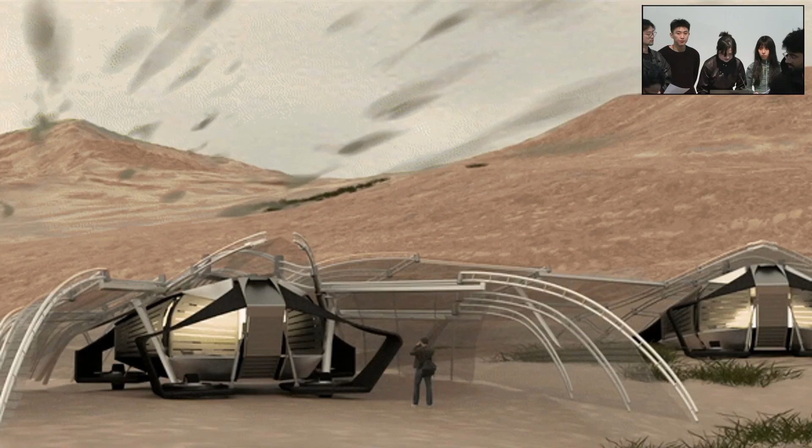With climate change, extreme hot weather influences the ground and environment. Hygro is a proposal for an agricultural response to flash droughts and heat waves. We aim to mitigate the process of aridification by applying the principle of moisture balance. To this end, we designed a dynamic and responsive habitat operated by a community of wilderness rangers living on mobile and transformable units. The units individually and collectively facilitate water harvesting through shading, water condensation, and wind resistance. Water is used to sustain the community and enable soil humidification, alleviating the negative effects of flash droughts, allowing for safer and better management of water and soil towards practices such as regreening and sustainable agriculture.

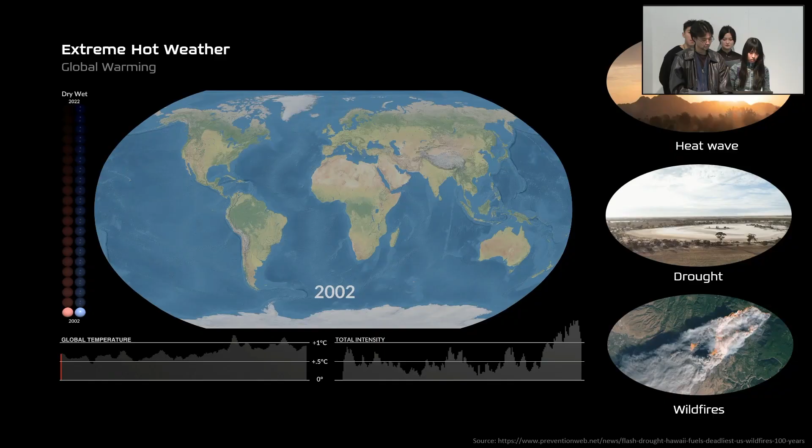Firstly, there is our environmental research part. Our project works for flash droughts that happen in extreme hot weather. With global warming, extreme drying events such as heat waves, droughts, and wildfires are becoming more frequent and normalized.

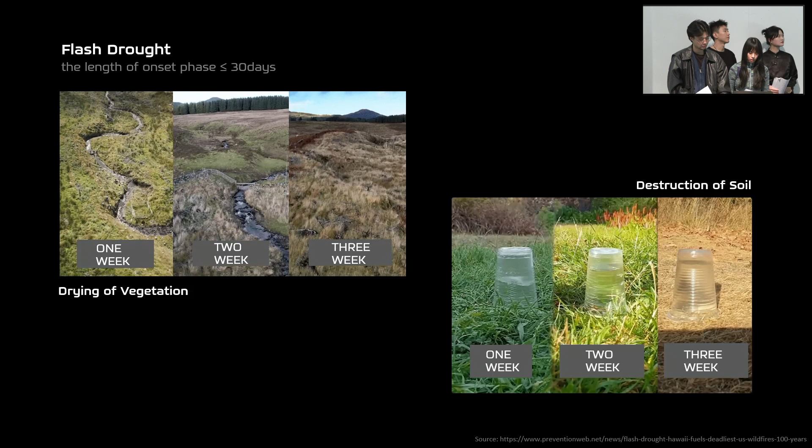From all types of drought, we find flash drought, which rapidly dries out vegetation and prevents the soil from absorbing water properly in only a 3-week onset cycle. The drying out of vegetation provides fuel for wildfires, which spread rapidly once ignited, and the destruction of the soil causes crops to begin to wither, resulting in a decline in crop production and economic losses.

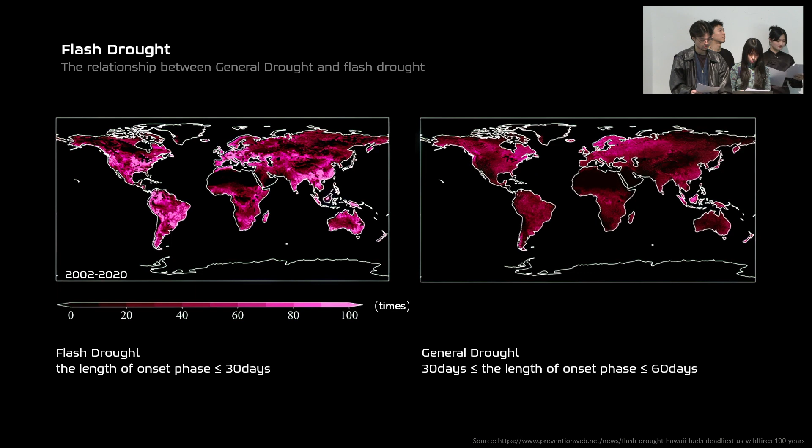By comparing flash droughts with general drought, we find that flash drought happens significantly more often than general drought. This is contrary to our perception of drought as a slow onset process, meaning we need to respond more quickly to flash droughts.

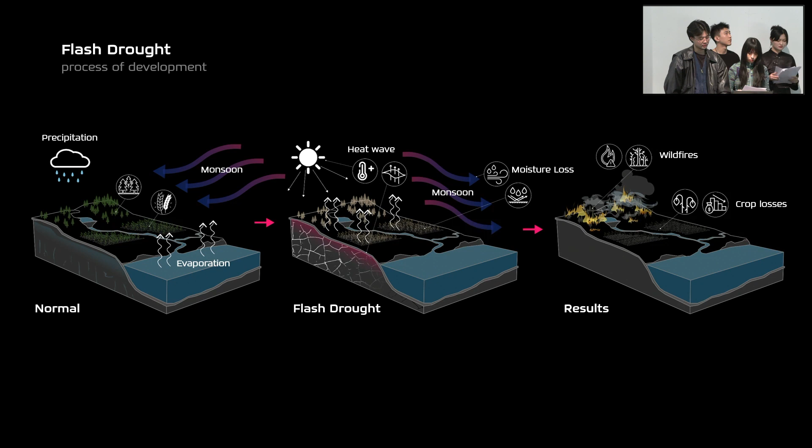We analyze the development of flash drought, which tends to occur in areas where vegetation and crops are able to grow normally under the influence of heat waves and monsoons, where the moisture in the soil evaporates rapidly and is carried away by the wind. This leads to flash drought and results in wildfires and crop losses.

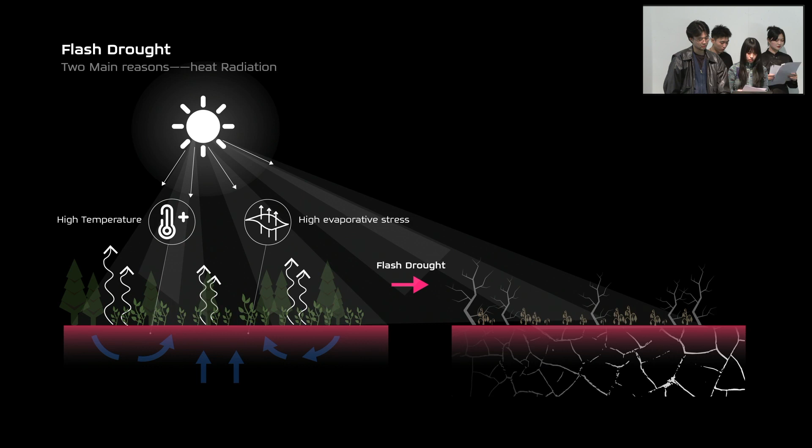Through the process of flash drought, we can say it happens for two main reasons. One is due to heat radiation, which increases the surface temperature and evaporative stress on the soil, leading to a rapid loss of soil moisture. The other main reason is wind: dry wind directly takes away moisture from the soil, drying out the vegetation.

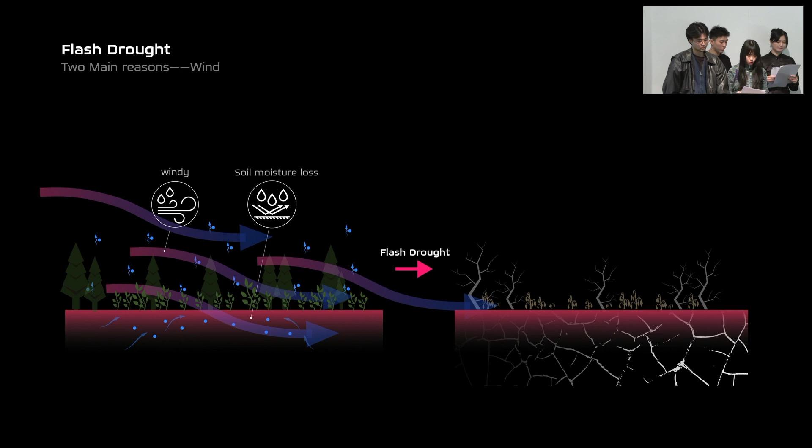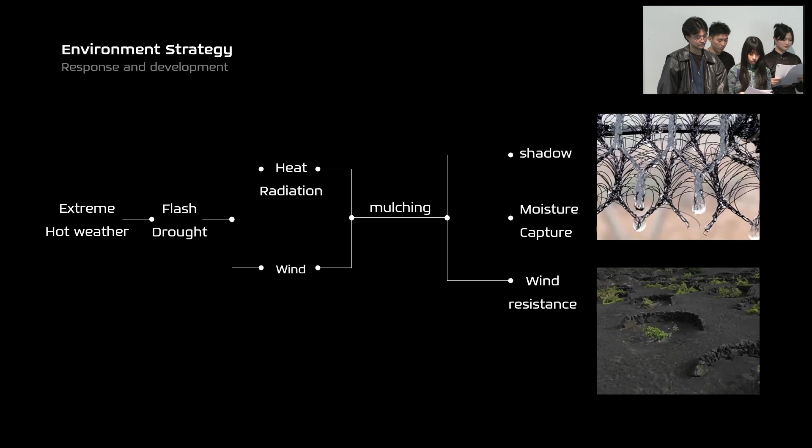In response to the causes of flash drought, we reference mulching. Mulching provides shade for the vegetation and reduces evaporation of soil moisture, as well as resisting wind from carrying it away. So we use mulching as an overall strategy for responding to the environment, and continue to explore how to provide shadow, capture moisture, and resist wind.

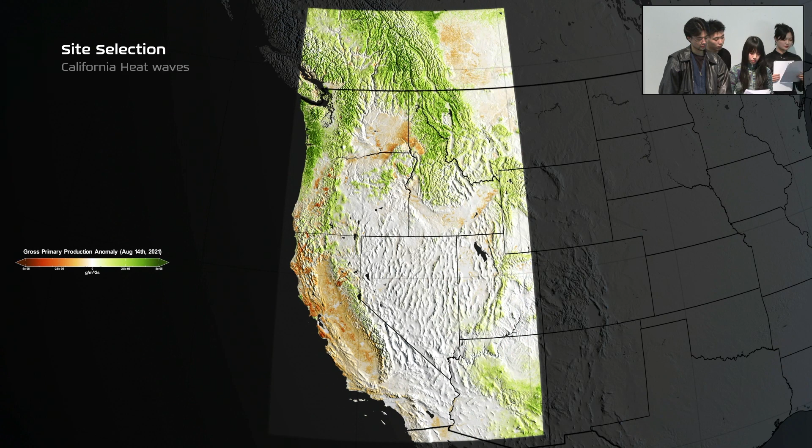So we further analyzed California, where the land is under extreme evaporative pressure due to heat waves. Vegetation has become extremely dry and the productivity of the land is declining. In addition, California is prone to monsoon winds.

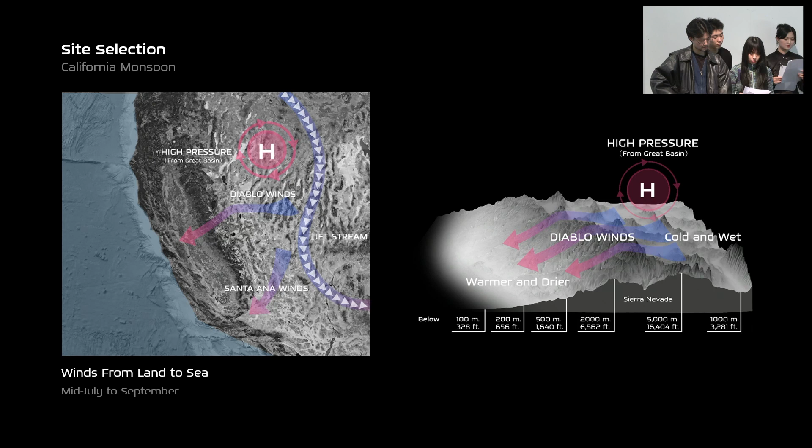These winds start in the Great Basin and blow towards the ocean. In the process, the winds are compressed and become warmer and drier, thus affecting the vegetation on the surface. So we analyze two important indicators for California: heat radiation and wind velocity.

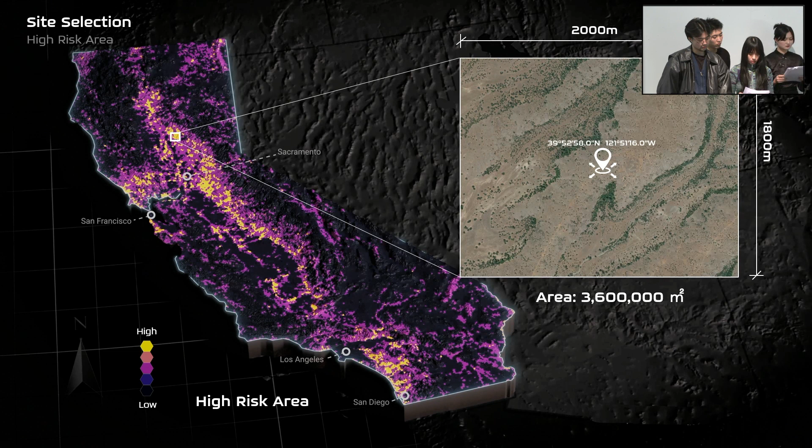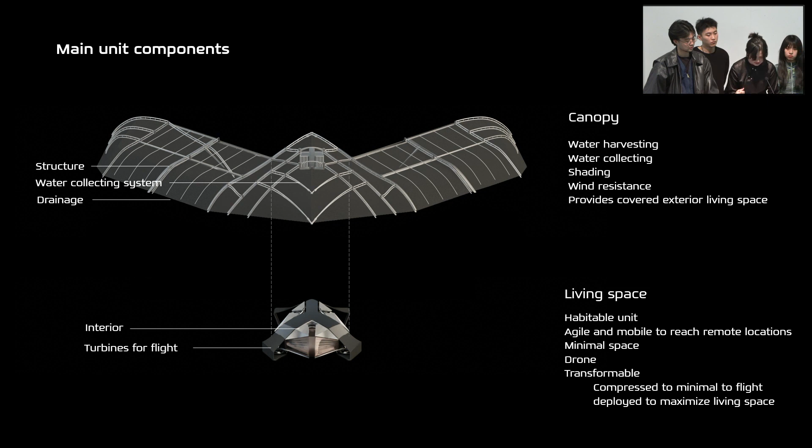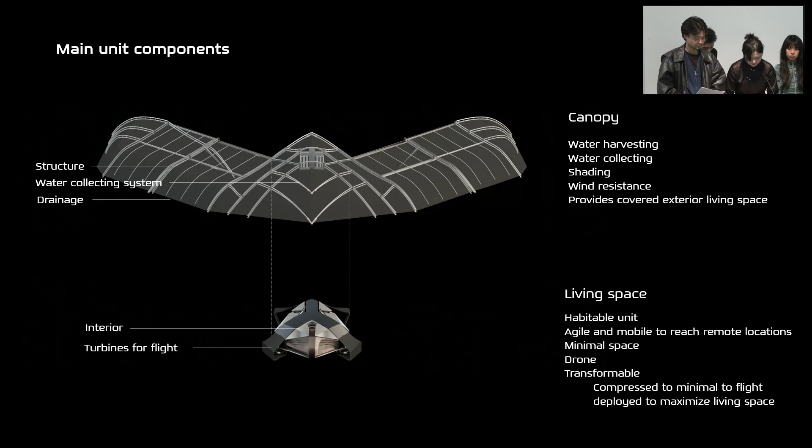Our units have two main components: canopy and living space. The canopy does most of the response to the environment, like water harvesting and collecting, shading and wind resistance, and provides a covered exterior living space. The living space part is a habitable unit, agile and mobile to reach remote locations.

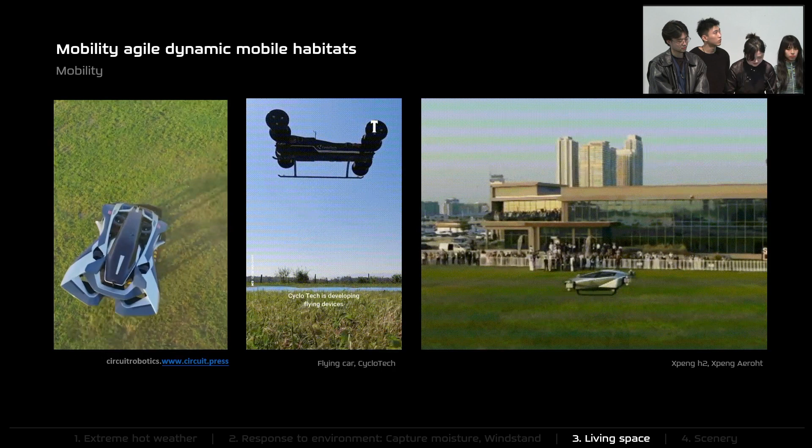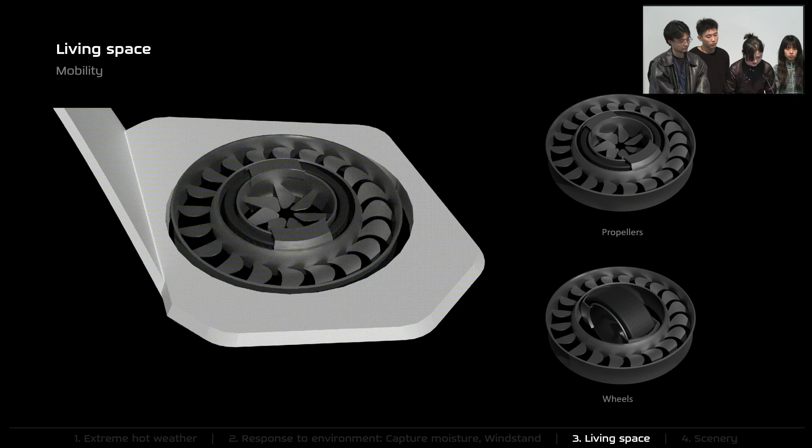There are many complex terrains within the site, such as mountains, plains, basins, etc. These complex terrains require the unit to have the ability to fly in order to reach different destinations. We wanted it to move slowly so it can cover more area, and also to move to another destination very fast. So we use propellers and wheels to satisfy the requirement of moving on ground and flying.

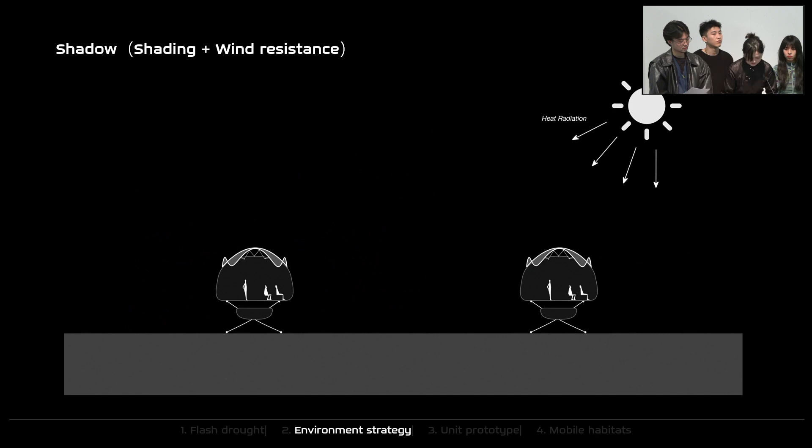With the principle of mulching, it's important to capture moisture. First, we need to respond to external sunlight and temperature. Because of solar radiation, the surface temperature rises, which increases the evaporation of soil water. So we want to create enough shadow with a deformed roof to decrease the ground temperature and reduce evaporation.

Second, the deformed structure should also act as a water harvester to resist evaporating water from going into the higher atmosphere. The evaporated water can be captured by the netting structure.

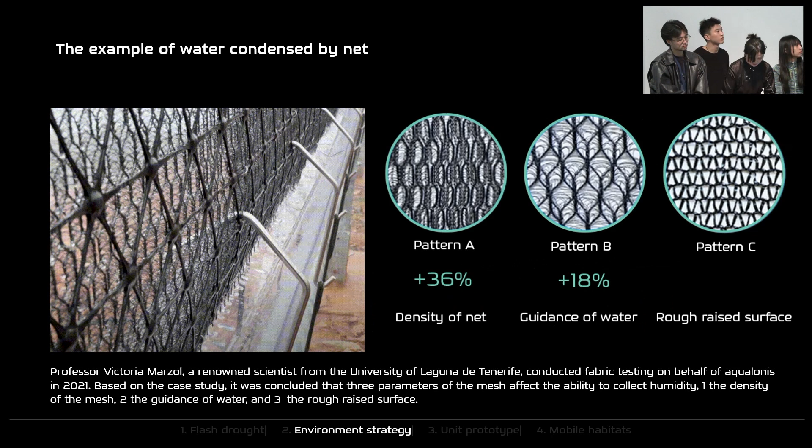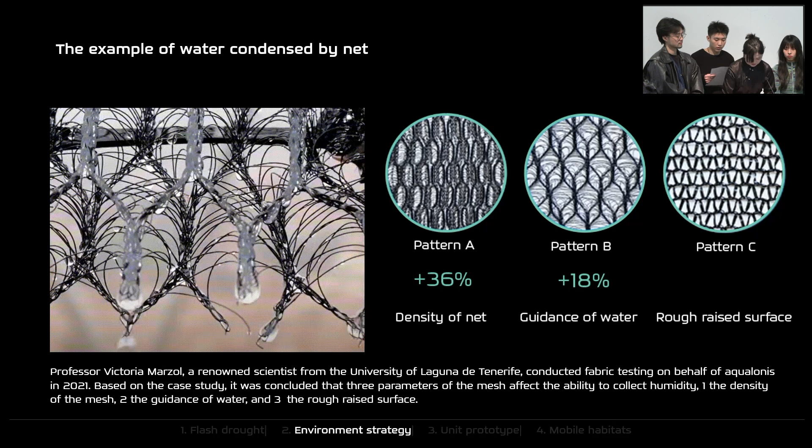From the reference, the factors affecting condensation are the density of the net, the way water is directed, and the tips of contact with water. The effect of pattern on water condensation shows that three different patterns: the more compact the net, the more water it can condense.

We also got the idea from natural creatures like lizards. Lizards have structures of varying densities and tiny grooves and spike-like structures on the surface of their skin.

We found that the more compact the pattern, the more organized the water flow and the less it drops. In the last pattern, we changed the shape of the net and figured out that shape is also a parameter.

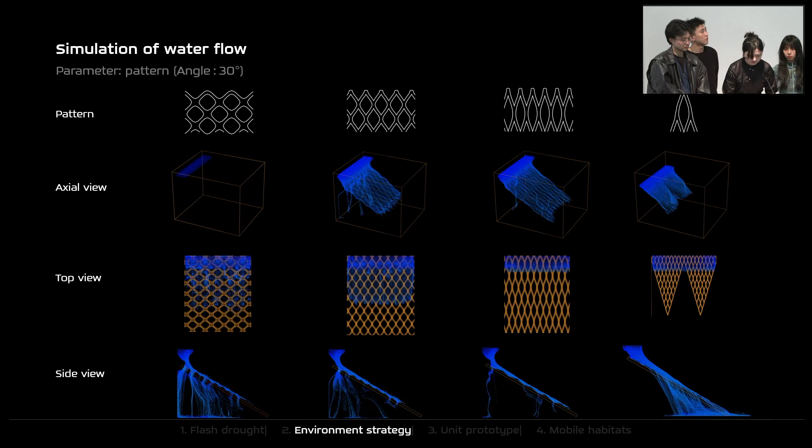to organize water flow. At a 30 degree decline, we controlled a certain angle. We found that water drops fastest in pattern 4, where it's not organized, and slowest in pattern 1.

After that, different shapes of water droplets were calculated, and finally the relationship between the droplets and the tilt angle was derived: the larger the tilt angle, the smaller the droplet size.

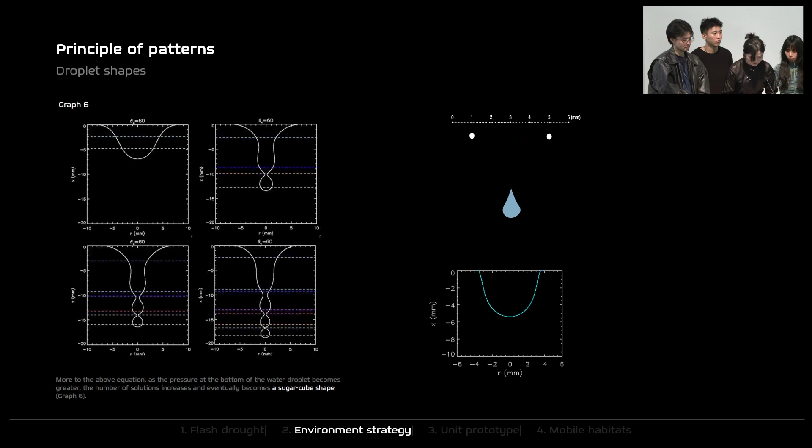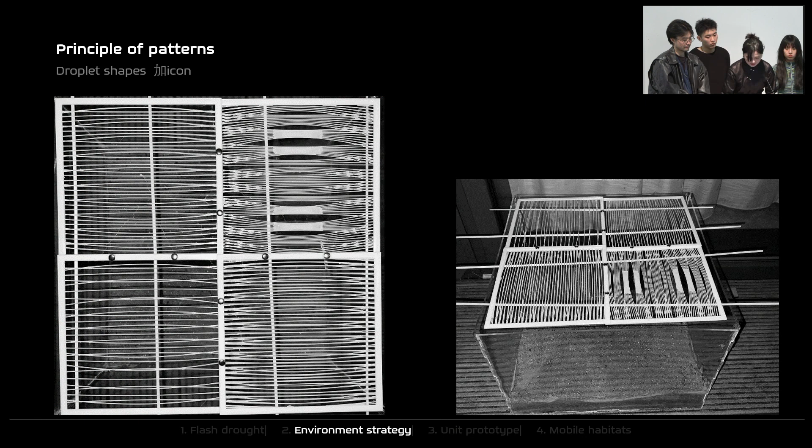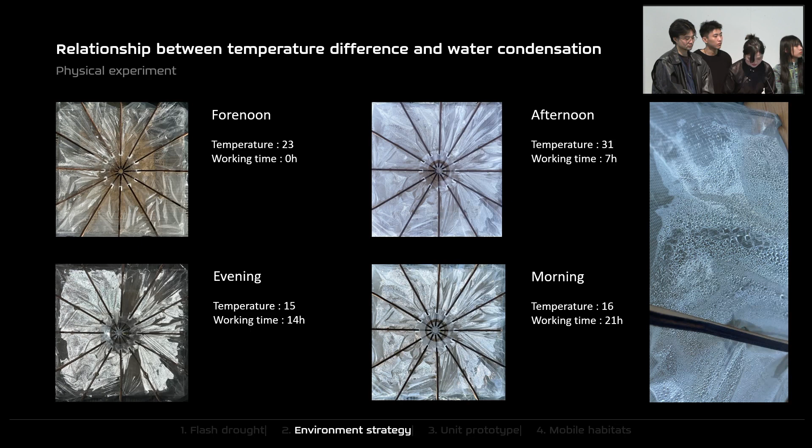Vapors condensed have different performance at different times of the day. To simulate the change of water evaporation, we added a quantity of sand and water in the glassware. It shows that the highest efficiency of water condensation happens in the morning, the period of greatest temperature variation.

We tested the nets with different parameters like density and pattern, and found that a 3.5 millimeter grid can condense the most water.

Different shapes of bumps show that cylinder bumps and cone bumps can attract more vapor. The water flow needs to be organized, and we tried straight and declined patterns; inclined patterns have better performance than the straight one.

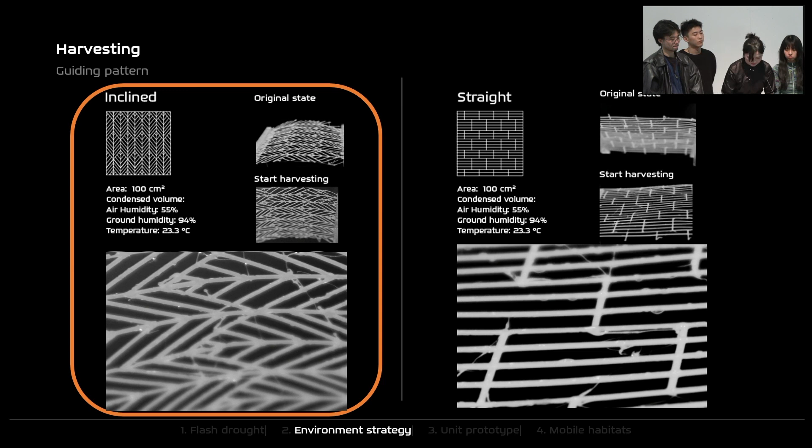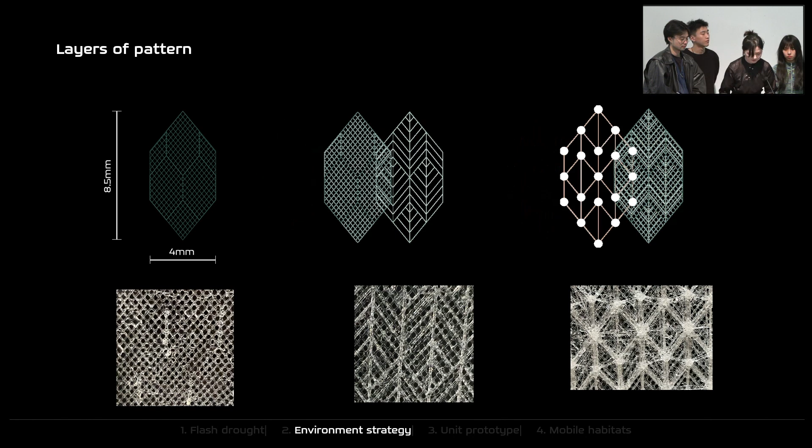With all the results, we tested them in a natural environment with specific air humidity and soil humidity, then tried to connect each layer together. We superposed the layers and added structures, shown at the bottom.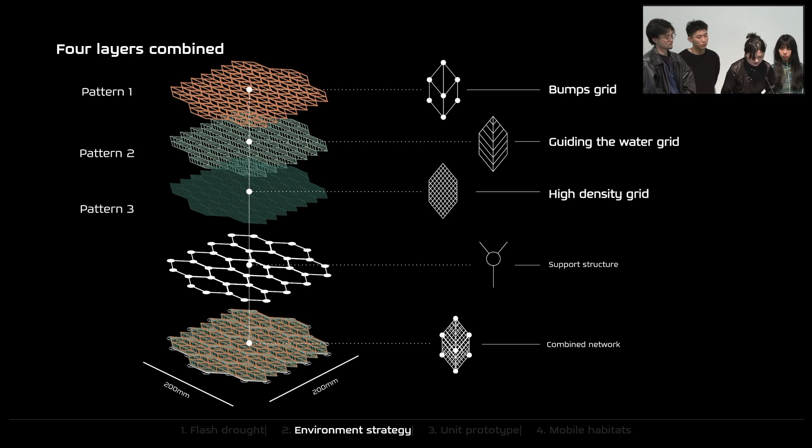The first layer adds a wider soft skeleton and toughness bumps. The second layer has wing-like shaped branches that direct water flow. The third layer increases the density of the grid and its contact area with air. Finally, the bottom layer is the supporting skeleton.

The combined net has better water retention capacity because of its relatively three-dimensional structure, where water droplets can stay inside the net.

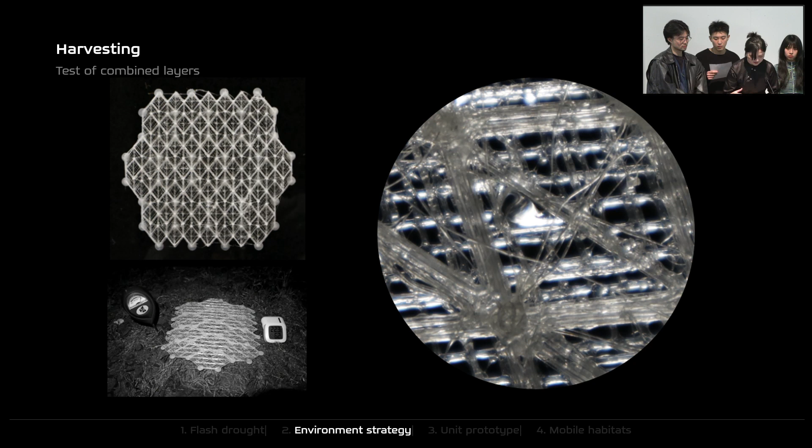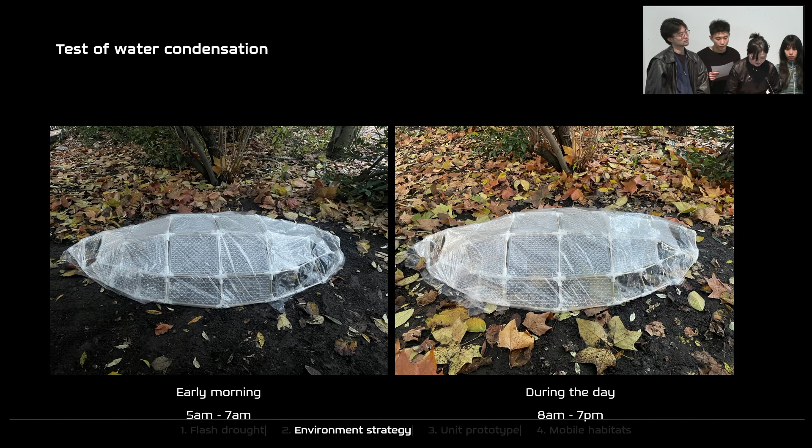To test the quantity of water the net can collect, we put the model out at different times of day, in the early morning and during the daytime. During the day, there's not much water condensed on the net, but in the morning, some water condensed in the net structure, shown by the red circle marking the droplet.

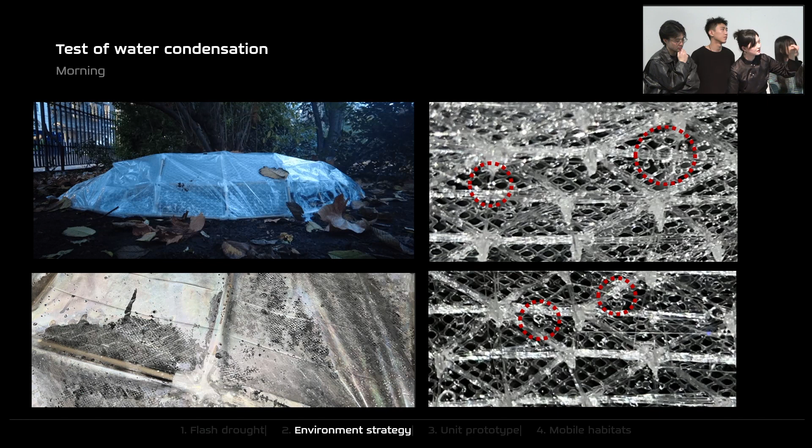To weigh the net and structure together, we get a quantity of water. The water harvesting structure is sloped at the edges to allow condensed water on the surface to flow into drainage for human use. The first diagram is very vertical to the rooftop, meaning it can't flow much water to drainage, while the second one has a specific angle.

When the angle is very big, the water will drop back to the ground and can't flow to drainage.

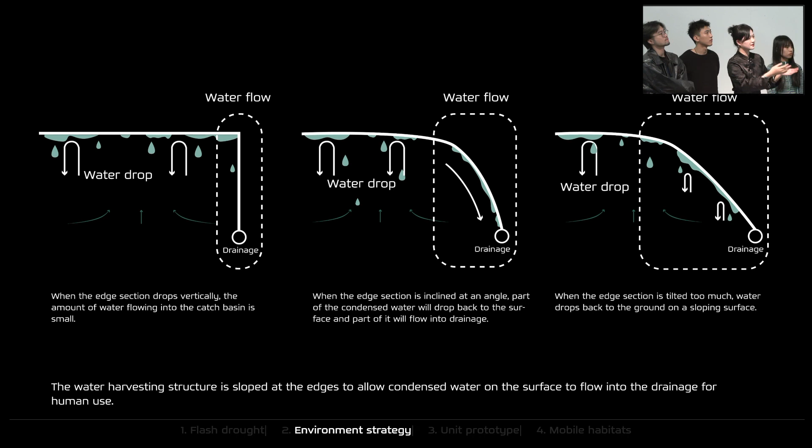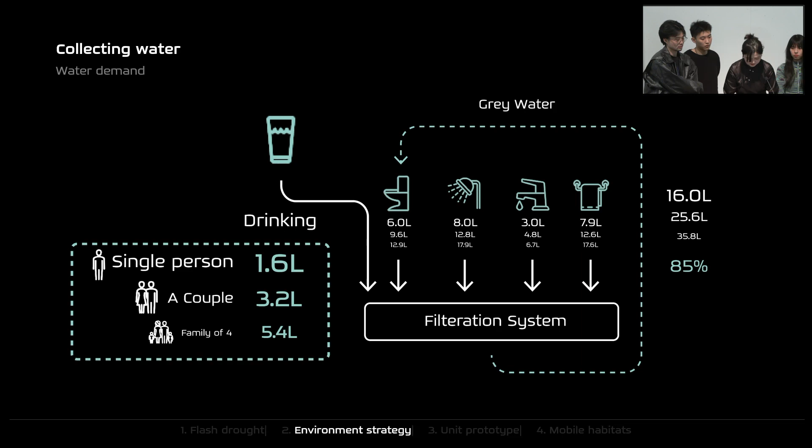By researching the demand for water use, we use recycled water to support household and bathroom needs, while drinking water needs to be collected from the environment.

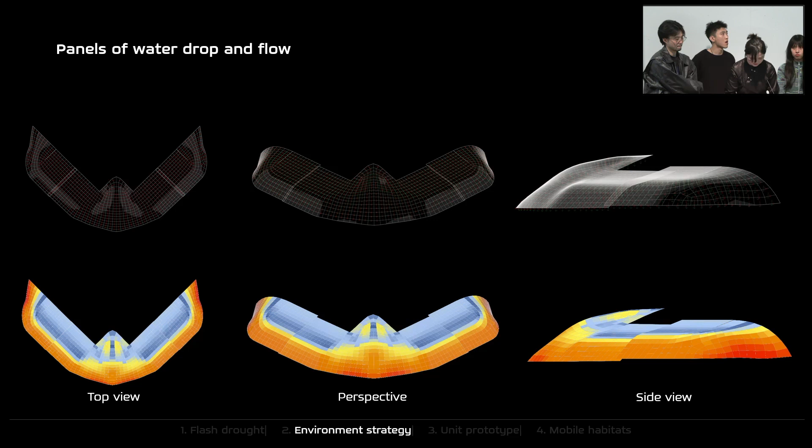To test the angle of each panel tilted, it leads to the percentage of water drop and flow. Based on the quantity of water needed to support human use, it leads to the size of the harvesting canopy.

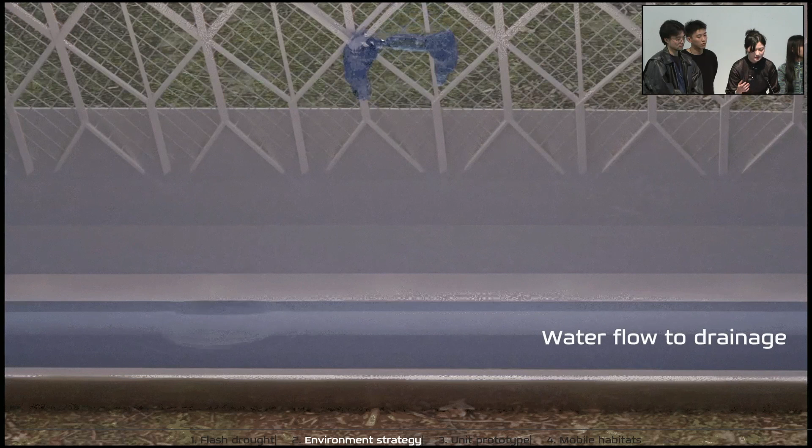Here's the animation of how the condensed rooftop canopy collects water and makes it flow to the drainage for human use. We use a net with declined tilts to make the water flow into drainage.

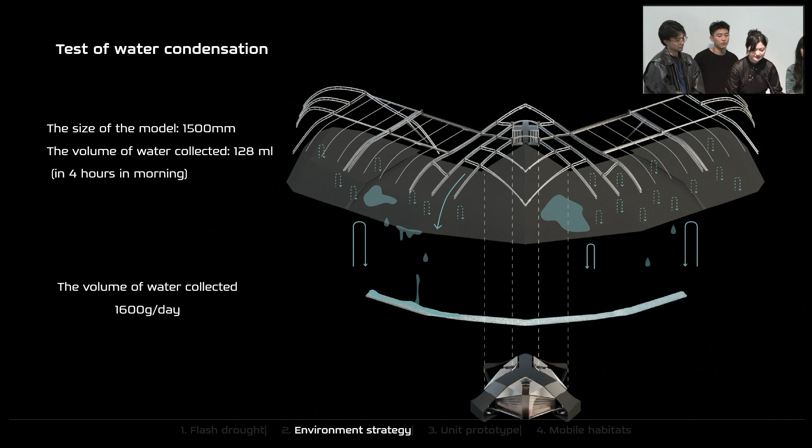And here's the quantity we calculated. We found that we used a model of 1.5 meters and modified it to calculate that it satisfies the human use of water.

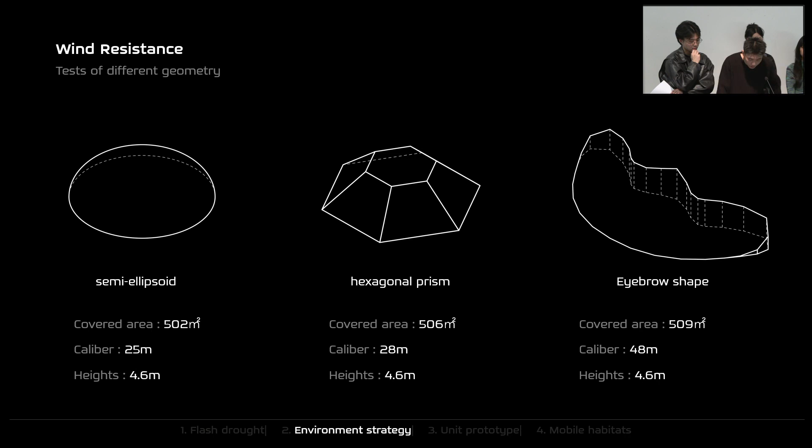So we compared the eyebrow shape to a different base shape for testing, keeping the same covered area. Then we ran the simulation to evaluate the performance of wind resistance. The eyebrow shape is the optimized shape.

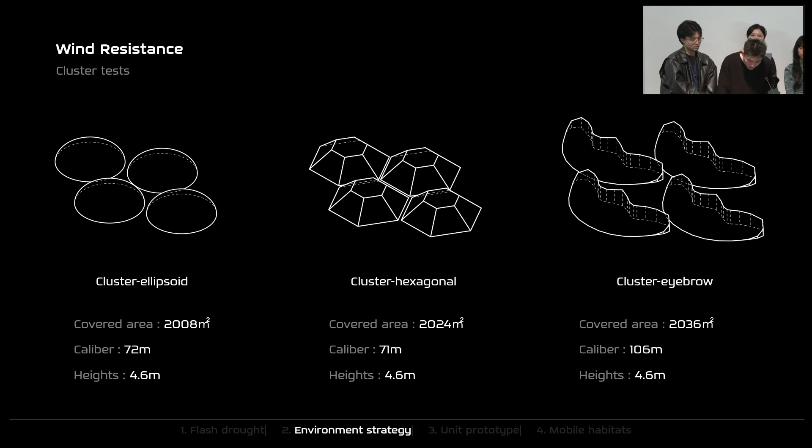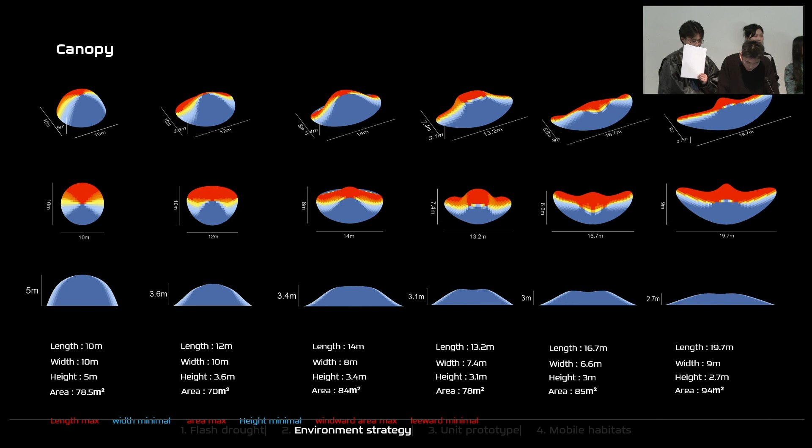We also compared clusters of different shapes. The eyebrow cluster is also the best. So we tested the relationship between the windward area and the wind resistance factor and came up with an optimized result. Those are the digital visions of how that can work.

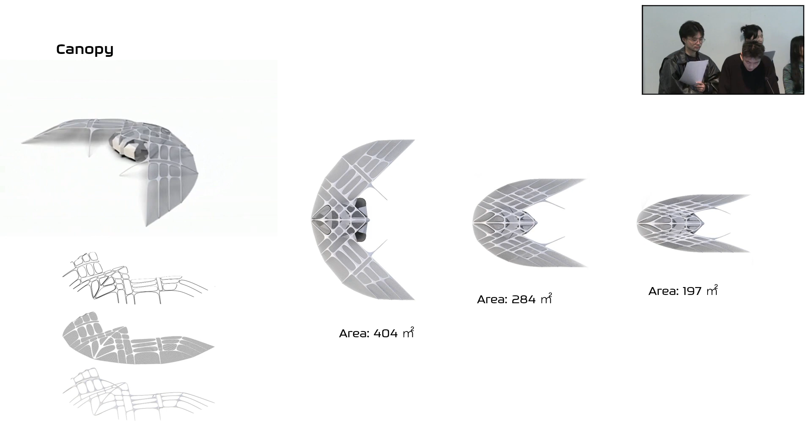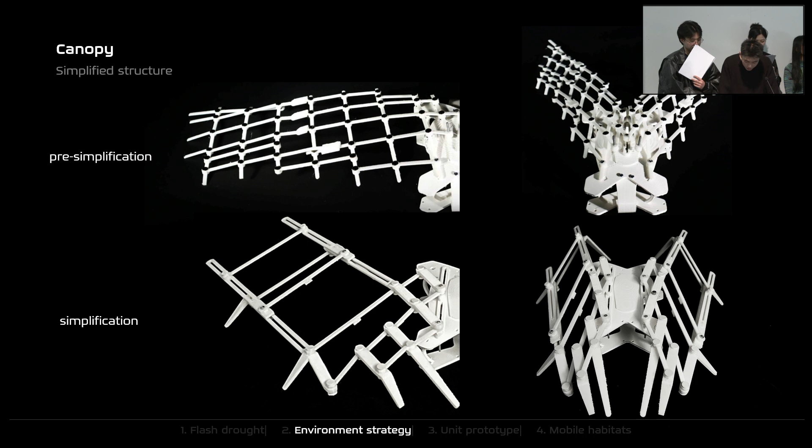Based on the simulation result, we corrected the first vision of the canopy structure, but it had too many joints and wasn't lightweight enough. So we made it simpler, reducing some rods to minimize the structure.

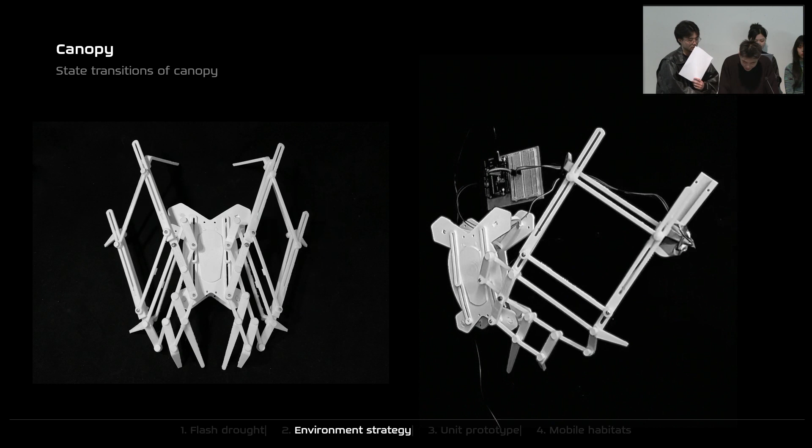I made the double deformation to enlarge the form variable by twisting and sliding. You can see the video—it's all on the Arduino.

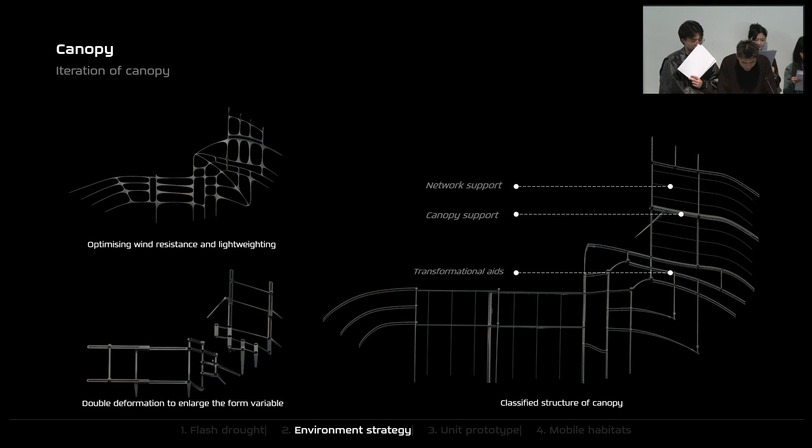Those are the iterations of the canopy: first for optimizing wind resistance and light weighting, and second for enlarging the form variable. We classified the structure of the canopy—some rods for network support can be very lightweight, while for the full structure it would be stronger. Those are the different ways of transformation of the canopy.

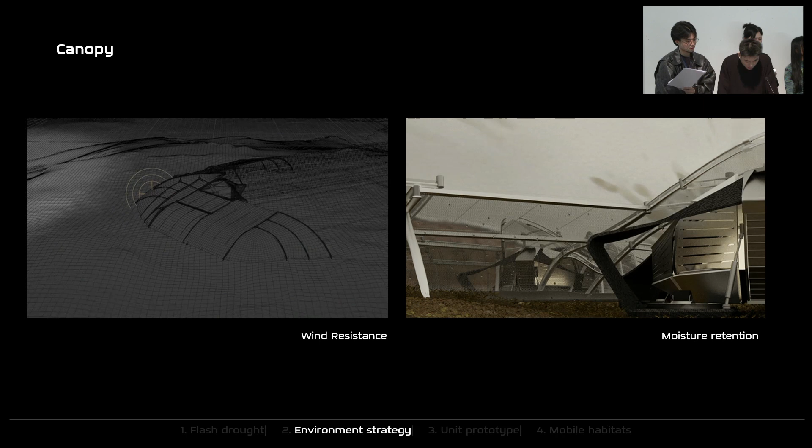In order to better adapt to the deformation of the structure, we tested different ways to select harvesting sites. This is the physics model for the harvester. When wind comes, the air behind the canopy gets less wind, which protects it from flash drought.

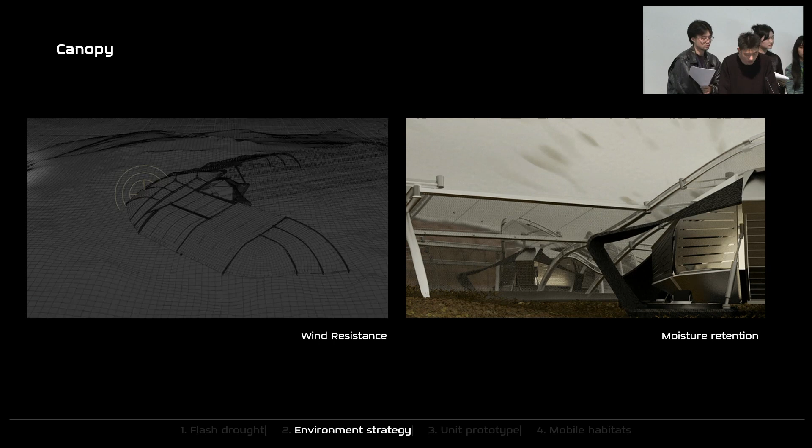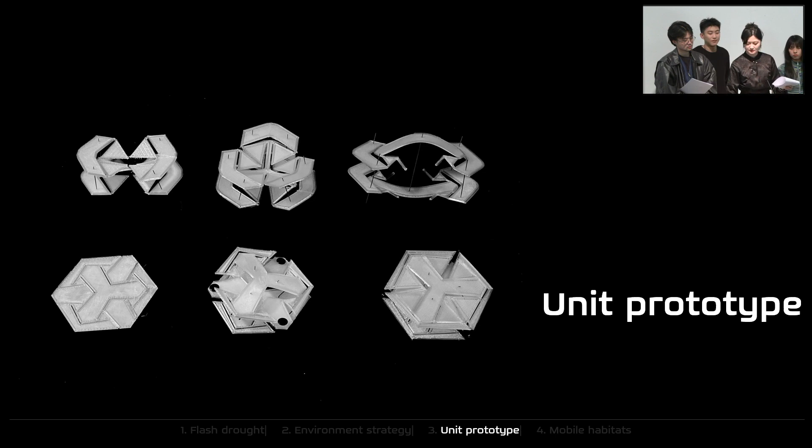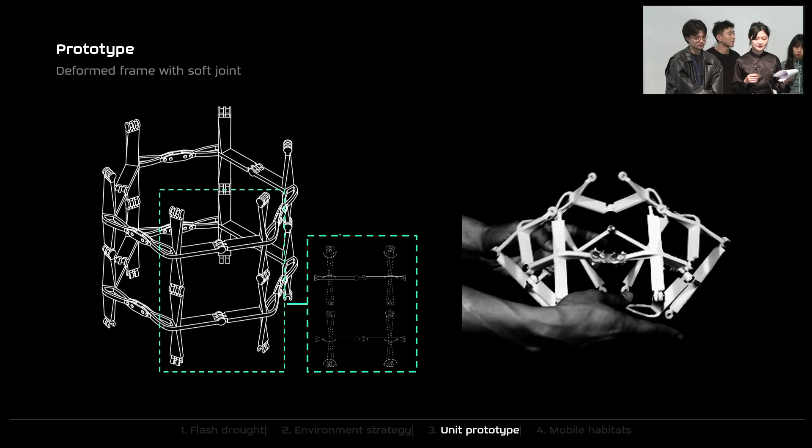To explore the possibilities of spatial contraction and expansion, we tried a series of prototype attempts. The deformed frame was the first one we studied to discover the possibilities of spatial extension and deformation interlocking. Here is our first attempt at enclosing the volume, which can contract inwards and expand outwards.

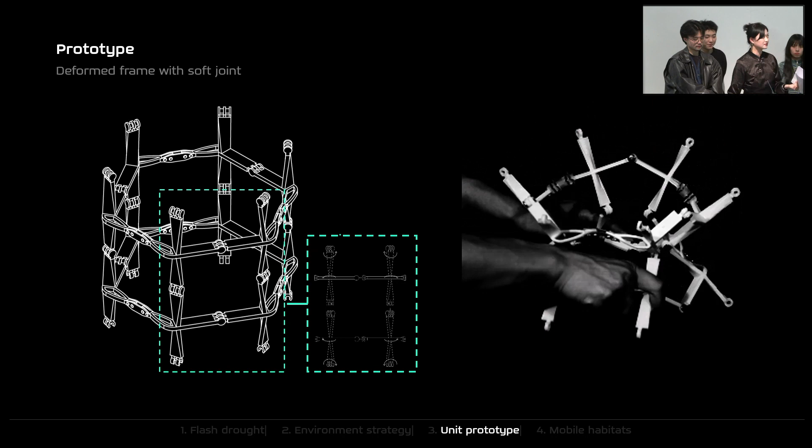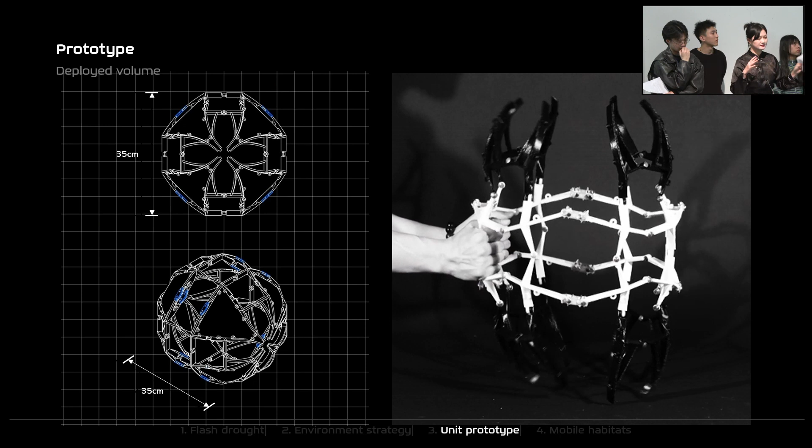We also tested soft linkage and used the deformed frame to connect them. We found that the deformed frame has good linkage performance, meaning it can move together with all the joints. Here is the deployed volume model that can transform well.

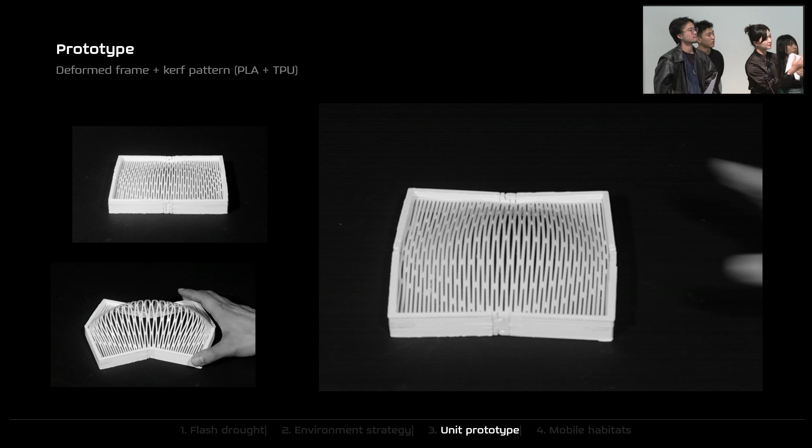We added more folded times to the deformed frame, and we added a kerf pattern together with the deformed frame to make it like bumps to expand the space. To make a double layer, it can act like that.

Next is about the prototype of living space. The demands of living space are that it can be flexible for moving and expanded to provide a more comfortable living space. So we started by studying the bistable structure, and we found that all the transformations are driven by the triangle drivers.

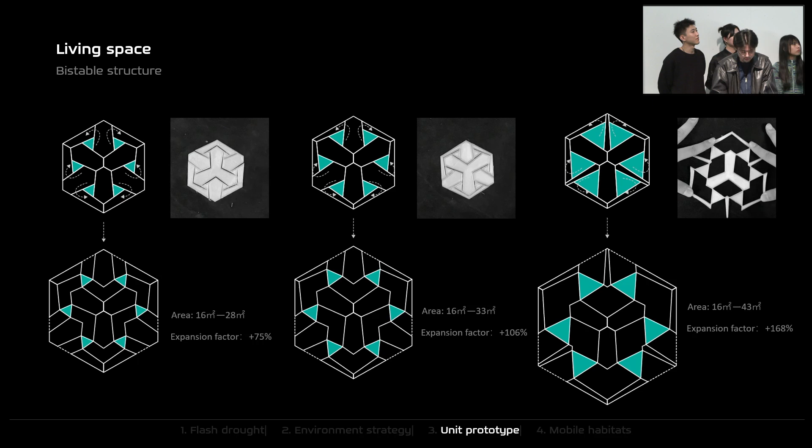The good point is that it can be expanded by itself. Also, if we want the expansion factor increased to the next level, we can make the triangle drivers rotate themselves, and it can expand into more than twice its original size.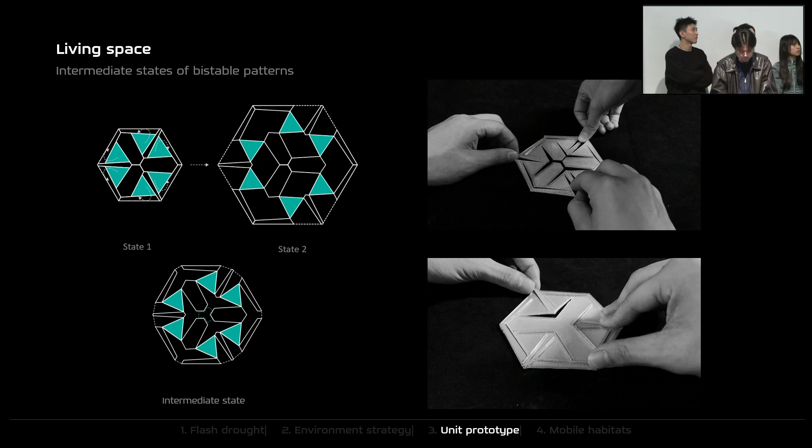As we continued to look at the bistable pattern, we found that if we connect the gap, it will expand in the vertical direction. So by this, we tried to combine the double layer structure, and the pattern itself can be transformed from the panel to volume.

So we made the driver for the dynamics of the transformation. It can work like the video.

We tried to structure it with rigid geometry to envelop the space. It was not only expanded in volume, but at the same time the single layer space was turned into double layers. But we still wanted it to expand from volume to volume, so we tried some types of different layers of the bistable structure.

After we structured the soft one, we found it was very hard to control the angle of rotation, and the deformation is hard to drive, which makes driving the deformation difficult.

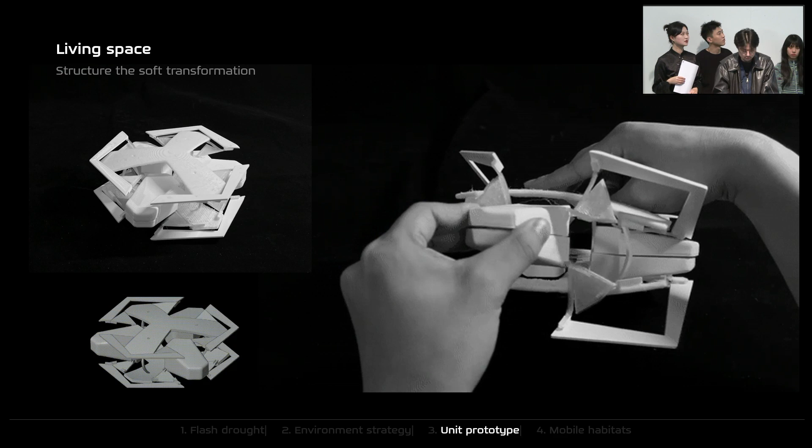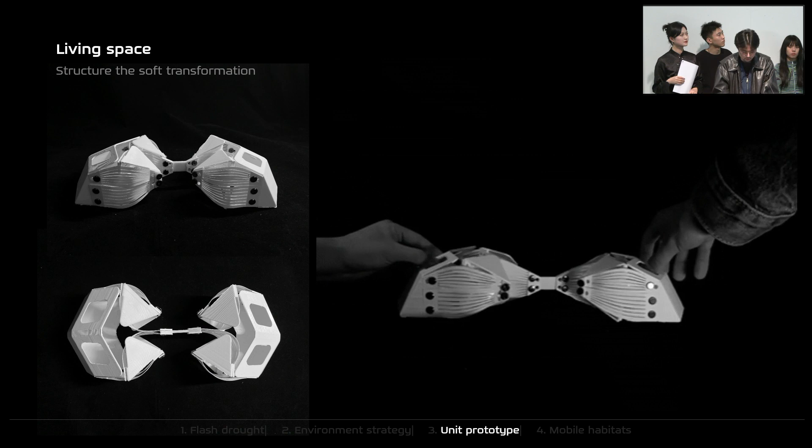We then split this bistable structure and got more expansion. We tried to use the soft envelope and got more expansion. It worked better for expansion.

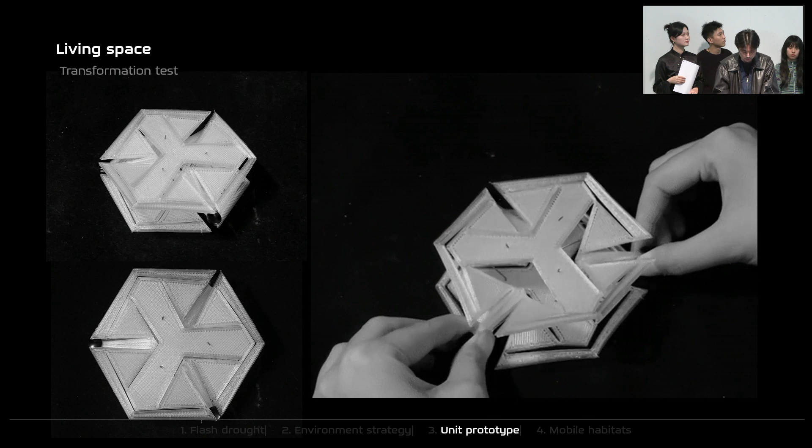So we combined the strong points together, like making the driver bigger to be more rigid, and using a soft envelope to ease the angle changes.

For our unit, it should be as lightweight as possible. So we tried to use an airbag as the dynamic to transform our units and used a minimal space separation to get the space more fit to live in.

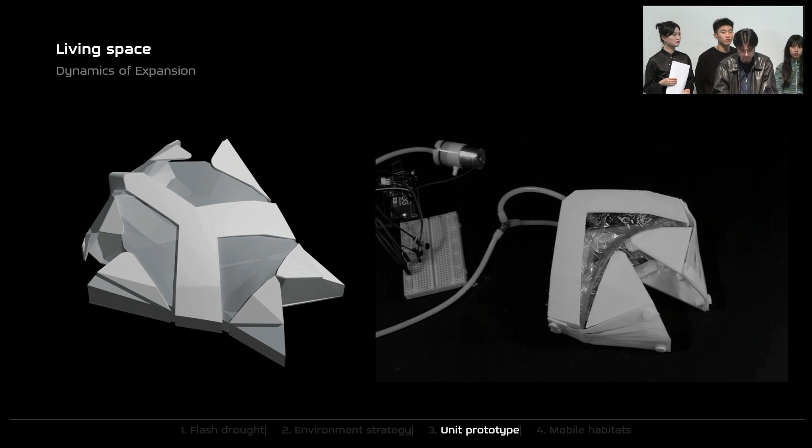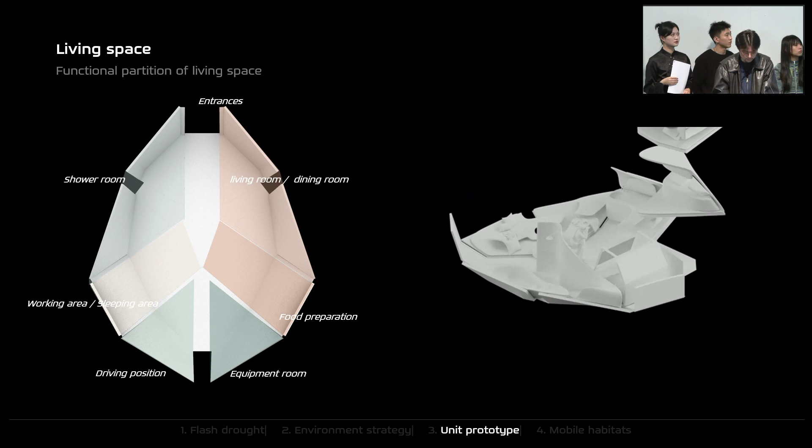Here are the functional partitions of the interior. We divided along the major expansion sections, and with the space change, we want the interior to be more functional.

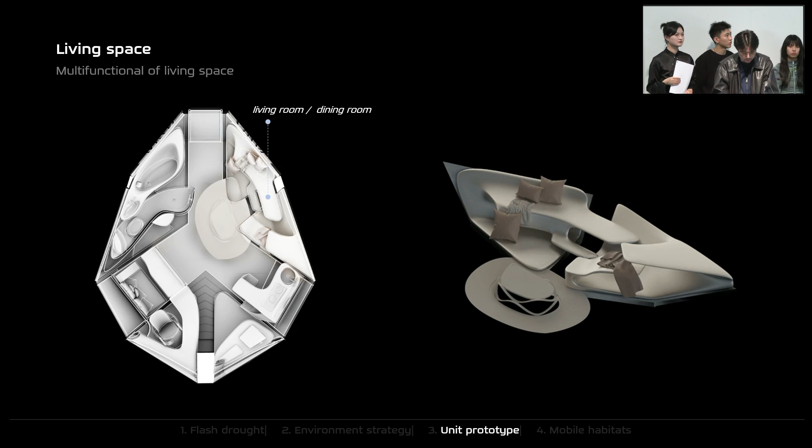So the animation shows how the working area would be transformed into the sleeping area, and also the living room would be transformed into the dining room. The side table could be transformed into the dining table. Also, this animation shows how the interior expands, making the functional changes.

Here's the floor plan comparison before and after the interiors expansion. As you can see, the area of living space has expanded from 26 square meters to 46 square meters.

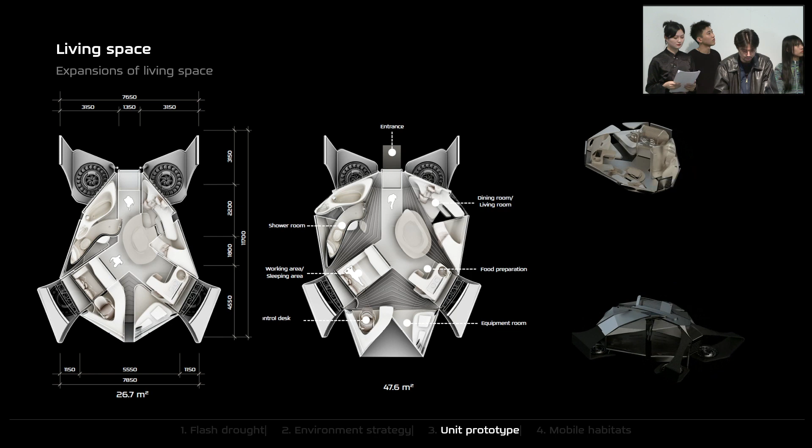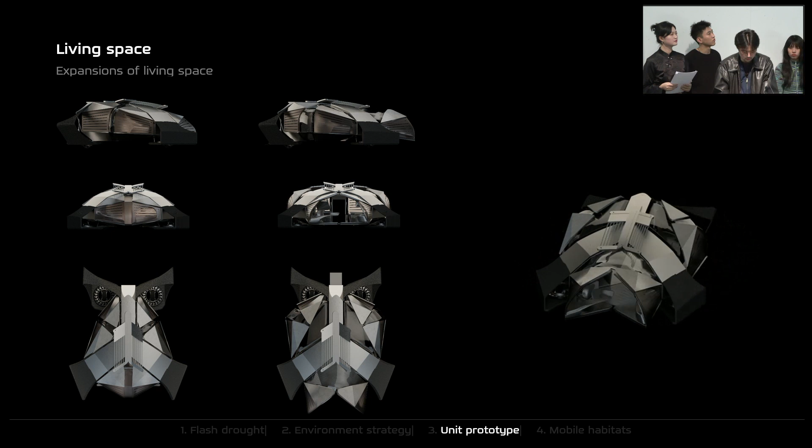This is a different view of living space and animation of the transformation, and this is an explode view of living space.

The unit performs better when it's collective than single, but the unit can't have enough ability to collect water and energy, so we make an energy station. It can support like 3 to 6 units to get energy and water.

It's also a harvesting canopy storage. The unit can collect the canopy from the station, and then it goes to other arid areas to do the balanced humidity work. After the field is greening, it comes back to get the canopy and goes to other spaces, other places.

It's also an environmental detector. It can search for where flash drought is happening and get the units to go there.

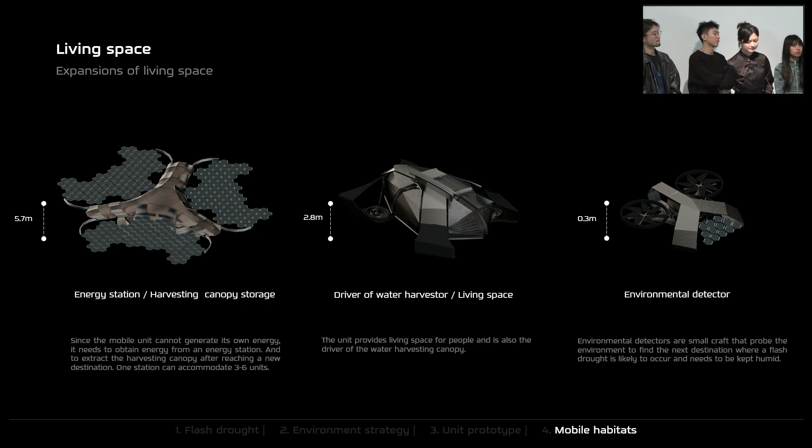The cluster always forms in places in valleys, and the reason for the clusters is hot radiation and wind. So it's always resisting the wind and facing back toward the wind side.

Here's the exterior of the living space and how it works in the field. When you work in clusters, you have better efficiency to heal the field.

Here's the timeline of our unit working. The unit can fly individually and get to the energy station to collect a canopy and take energy. When it comes to the field, the arid area, or a flash drought happens, it can deploy the wings and the living space, and it becomes settle mode.

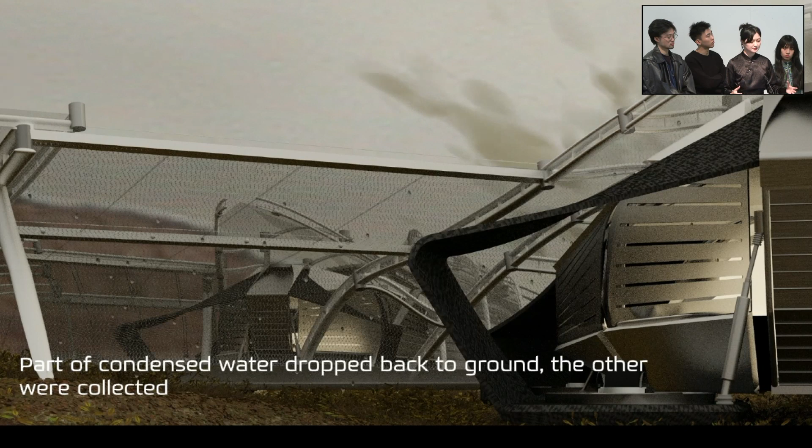And when the flash drought passes, they come back to the energy station to take the canopy back and fly away.

Fly to another target. Here's the collective working scenery.

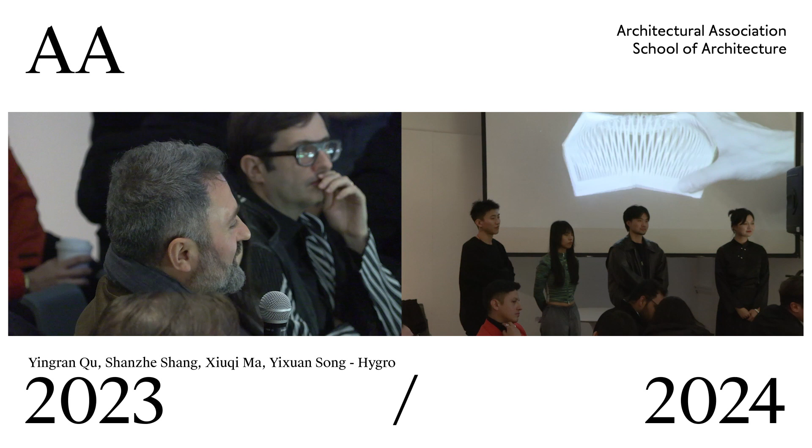The whole discourse about trying to have mobile architecture is to try to get very close to the automotive industry, and say this object is going to cost exactly like one of the SUVs that we see on the road, which are not needed anyway, not on the road, nor on the Californian arid landscape. But in a way, I think that would be the challenge: when you can reproduce, mass produce, and mass customize using the automotive industry as a reference.

I think in a way you can achieve a reduction of cost. Of course it's, as you're saying, precisely absurd because before we get there it's going to be a big challenge. But anyway, the other aspect about the community: I think the idea of curing the wilderness, the landscape, or taking care of nature, is actually an idea that leads to having a proper job, taking care of nature as part of a larger ecosystem, which includes also the built environment.

And that's why they call it rangers. They are practically part of this human interface with nature that is not only addressing issues locally, but larger scale issues, which go back to the idea of climate changes, shifts, and this interaction with the weather, which is more resilient and less fearful, embracing the possibilities coming from critical conditions, I guess. But just to conclude from my side, thank you so much.